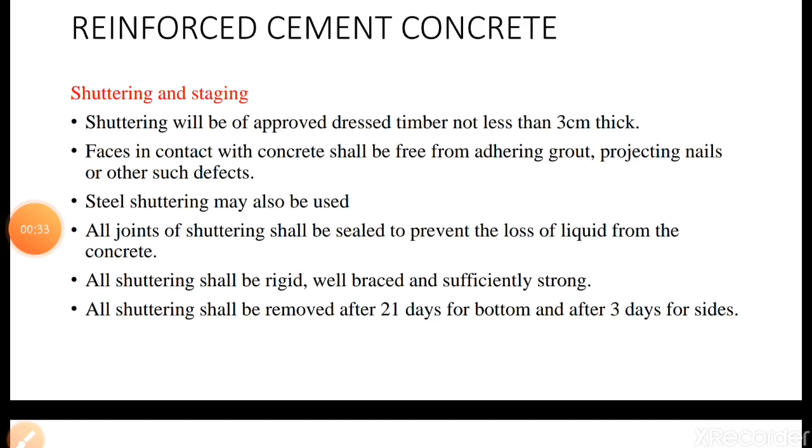Coming to reinforced cement concrete. When we talk about reinforced cement concrete, the specifications written for cement concrete bed will be used, because reinforced cement concrete is nothing but a mixture of cement, coarse aggregates, fine aggregates and water, and additionally we are adding reinforcement. So whatever specifications are required for reinforcement, that has to be added.

Along with that, we require centering and shuttering, because reinforced cement concrete may be used for columns, beams, or slabs. In such cases we need to provide shuttering and centering, which will be wooden or steel. Initially we write the specifications for centering and shuttering, then for the materials - cement, coarse aggregates, fine aggregates, steel and water - then how to mix the materials, laying, protecting and curing. These items follow one by one.

In case of centering and shuttering, shuttering will be of approved dressed timber not less than 3 cm thick. Centering can be done using timber. Earlier only timber centering was available, but nowadays it is replaced by steel. So either steel centering or timber centering can be used.

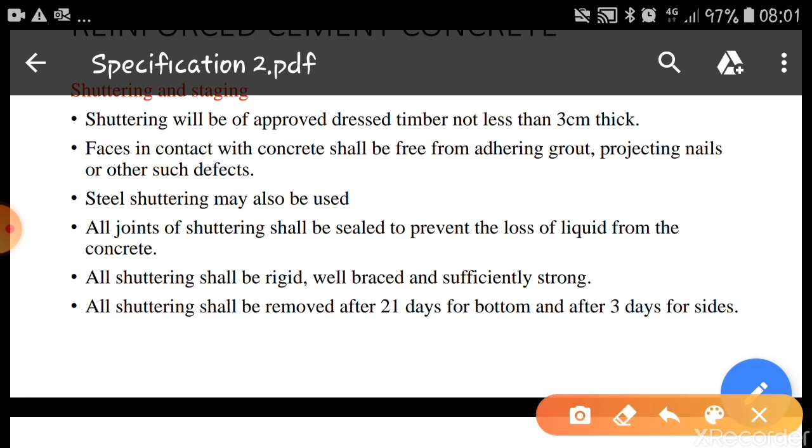Faces in contact with concrete shall be free from adhering grout, projecting nails and other such defects. Whenever we provide concrete above centering, the top surface should be free from adhering grouts, nails or any other defects. It should be smooth so that the concrete will not stick or give a bad impression on the surface. Steel shuttering may also be used for centering.

All joints of shuttering shall be sealed to prevent the loss of liquid from the concrete. Since we provide shuttering using timber or steel sheets, there will be joints between two sheets or between two planks in case of timber, and we have to seal these joints - either by providing steel tape or by providing tapes, so that the liquid from the concrete will not escape from these joints.

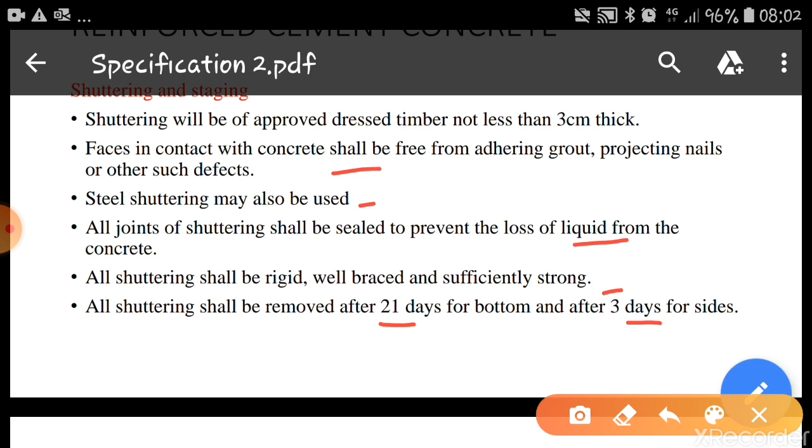All shuttering shall be rigid, well braced and sufficiently strong. All shuttering shall be removed after 21 days for the bottom of slab and beam, and after 3 days for the sides - nothing but sides of the beams or sides of the column.

Coming to the reinforcement, the steel bars shall conform to IS specifications, free from rust, paint, grease, oil, etc. When we talk about steel reinforcement, it is from IS specifications - Indian standard specifications are there which has to be satisfied, maybe the diameter, maybe the length, maybe the strength, all these factors it should satisfy.

All reinforcement bars shall be accurately placed with necessary hooks, bends, etc. Whenever we are going to place the reinforcement, we should see that the steel bars are straight. Wherever hooks are required, these hooks have to be provided, and wherever bends are required, these bends have to be provided clearly.

The cover for concrete to reinforcement shall be as specified. We have to keep covers for the reinforcement so that the steel bars will not be exposed after laying the concrete. According to IS code books, we keep a covering of 20 mm for slabs, 25 mm for beams and 40 mm for columns. These concrete blocks can be of concrete or hard stone as specified by the engineers.

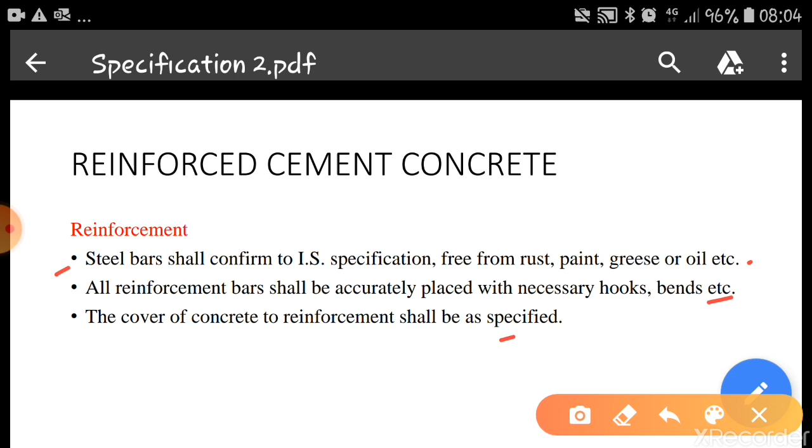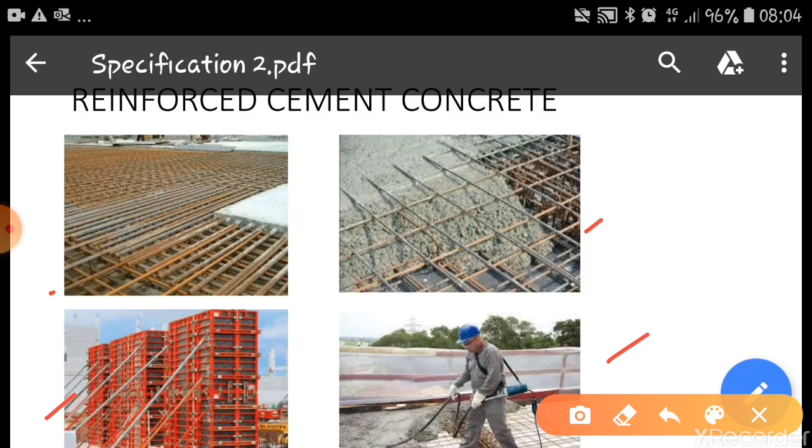As I've told you, proportioning and mixing specifications are the same as that of cement concrete foundation bed. Proportioning of concrete - cement, sand and coarse aggregates - will be 1:2:4 or 1:3:6 as specified. Normally they will specify in terms of M20 or M15 mix. M15 means it is 1:2:4, and M20 means it is 1:1.5:3. These proportions have to be considered.

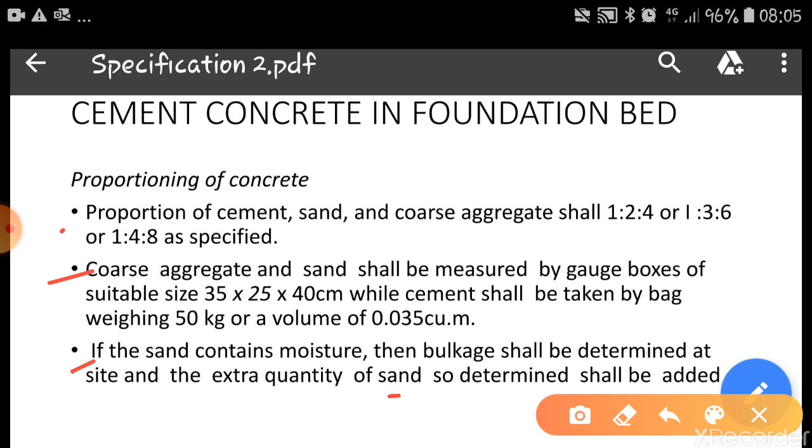Coarse aggregates and sand shall be measured by gauge boxes of suitable size. The volume of gauge boxes should be 0.035 meter cube, or equal to the volume of cement, so that we can perfectly do the volume batching. If the sand contains moisture, then bulkage shall be determined at the site and extra quantity of sand shall be added. As far as possible the sand should be dry, but if the sand contains any moisture, then proper amount of bulkage has to be considered.

Mixing can be done either by hand mixing or machine mixing. If you are using hand mixing with a 1:2:4 or 1:1.5:3 proportion, we have to spread all the coarse aggregates first on a dry platform. Then over that we apply a dry mixture of cement and sand, making sure this dry mixture spreads entirely over the aggregate, and then we apply water and mix it thoroughly. This is called hand mixing.

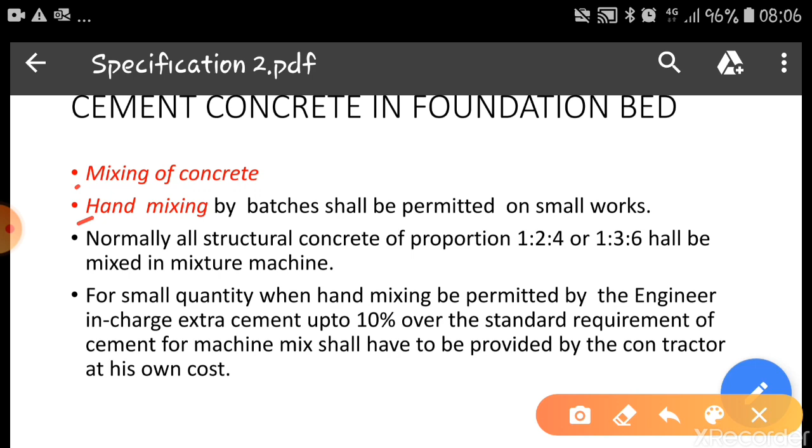But normally for reinforced concrete, we are not going for hand mixing unless the quantity is very small. Sometimes for columns, because the quantity will be small, we go by hand mixing. But as far as possible, mixing should be done using concrete mixers.

In machine mixing, the coarse aggregates shall be placed first, followed by sand, cement, and then water. This is the procedure for putting things in the mixing machine. Water is then added gradually to the required quantity to achieve the desired water cement ratio. Mixing shall continue until there is uniform distribution of material and the concrete is uniform in color and consistency, but in no case shall mixing be done for less than 2 minutes after all materials, including water, are in the drum. So a minimum period of 2 minutes we have to keep the materials inside the drum, then remove it and lay it on the surface.

The mixed concrete shall be unloaded on a watertight masonry platform or on a steel plate. Only the quantity required for immediate use should be mixed at one time, and the entire quantity shall be removed and placed in position before the initial setting time of the cement. Normally the initial setting time of cement is 30 minutes, and within that time we have to complete all the processes of mixing, laying, compaction, and vibration.

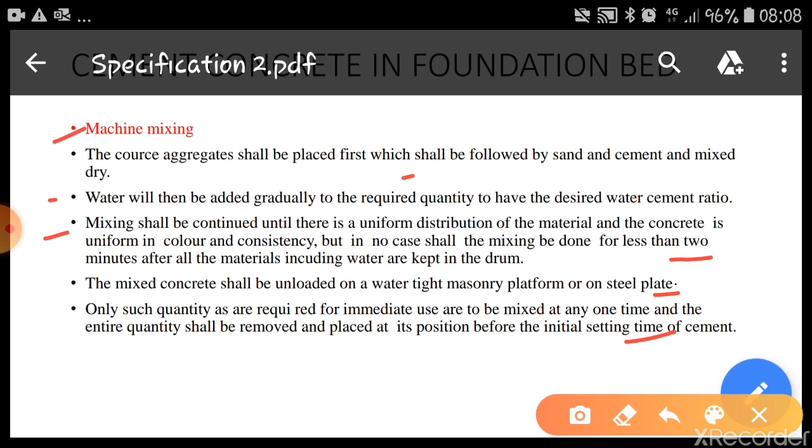Workability of concrete shall be checked at frequent intervals. The slump test, or where facilities exist, the compaction factor test, shall be adopted for this purpose.

Before proceeding to place the concrete, the masonry platform or centering should be wetted so that any dust particles are removed from the surface. Concrete shall be dropped from a height of not more than 1 meter. Each layer of concrete placed will be consolidated by mechanical vibrator. All surfaces after consolidation shall be free from air holes, honeycombing, and other blemishes. Any water accumulation on the surface of newly placed concrete shall be removed by approved means.

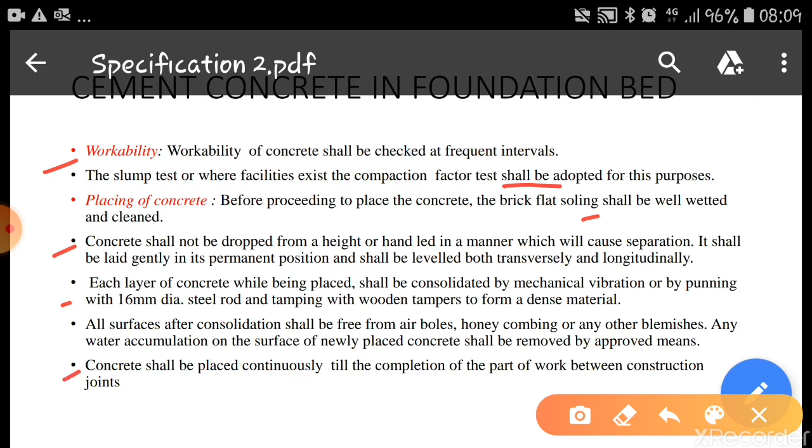Concrete shall be placed continuously till the completion of the part of work between construction joints.

Regarding protection and curing: all fresh concrete shall be protected for 1 to 2 hours after laying from too rapid drying due to sunshine, and also from running surface water and shocks. That's why you have to see that if it's too dry, you have to sprinkle water on the surface of the concrete after 3 or 4 hours. Otherwise the concrete will dry too quickly and form shrinkage cracks on the top layer.

After 24 hours of laying the concrete, the surface shall be cured by flooding with water of minimum 25 mm depth or by covering with wet absorbent materials. Normally the method adopted is flooding. For slabs we do it by flooding, and for columns we cover them with gunny bags and keep watering the surface. The curing period shall be continued for 10 days, not 28 days. For beds, 10 days is sufficient, but for RCC works, 28 days of curing is required.

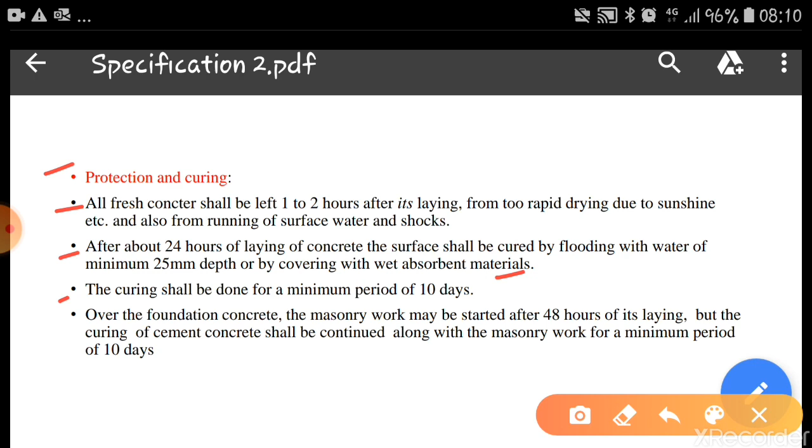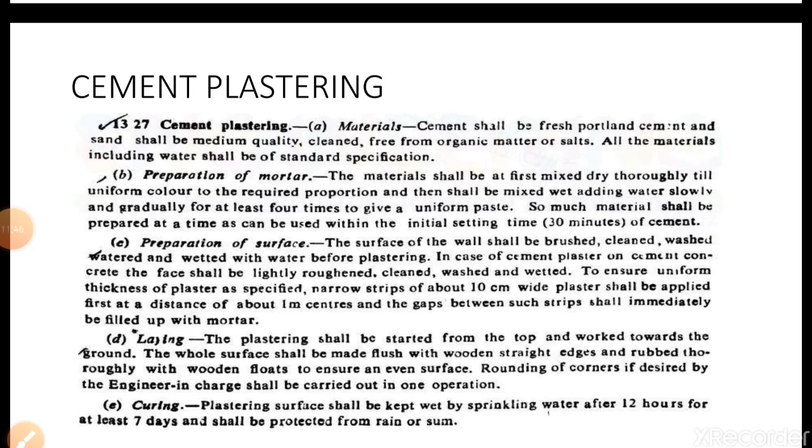So the next item we are going to discuss is the specifications for cement plastering. Cement plastering is a finishing item done once the concrete or masonry work is completed. Plastering can be done on masonry surfaces or on concrete surfaces.

When we do plastering, the surface must be clean and should not contain any dust or loose particles. We have to remove all loose particles on the surface of the masonry. If it is a concrete surface, the surface should be rough; otherwise we have to do hacking so that the plaster adheres properly to the concrete surface.

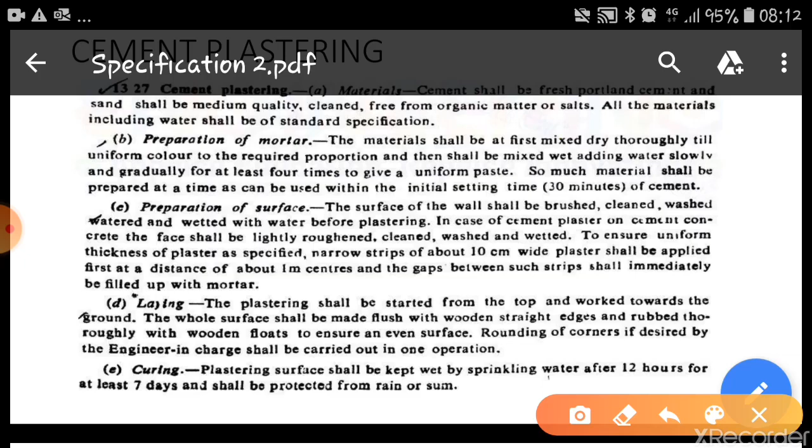As usual, before writing the specifications, first we have to write about the materials, then about the preparation of cement mortar, and then the preparation of surface, laying, and curing. These steps should be involved in the methods.

As the first step, cement materials: normally for cement plastering we require cement, sand and water, in the proportion as mentioned by the engineer. The material is nothing but cement, which shall be fresh Portland cement conforming to standard specifications. Again, we are not going to specify the brand name here, only that it should be as per standard specifications.

Sand should be medium quality, clean, free from organic matters and salts. Normally for plastering we use medium or fine quality sand, and it should be free from salts. Otherwise later the salt portions will appear and it will destroy the surface.

All the materials including water shall be of standard specifications. Water which is fit for drinking can be used. So these are the specifications which are required for materials.

Coming to the preparation of mortar. The material should be first mixed dry thoroughly till uniform color to the required proportion, and then shall be mixed wet, adding water slowly and gradually for at least 4 times to give a uniform paste. This is the procedure of mixing the materials.

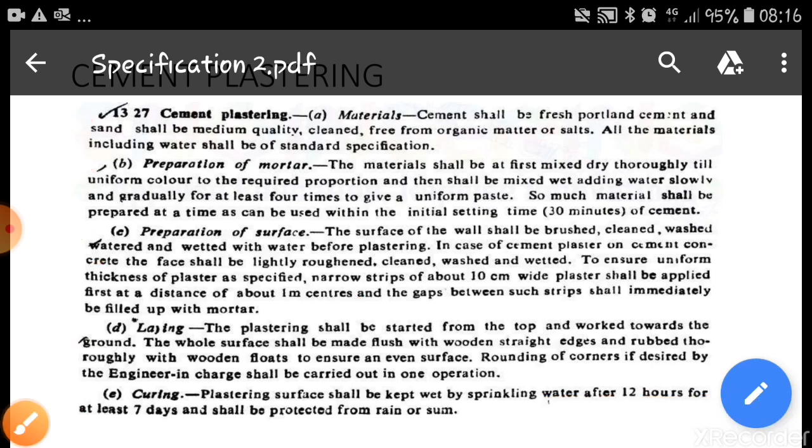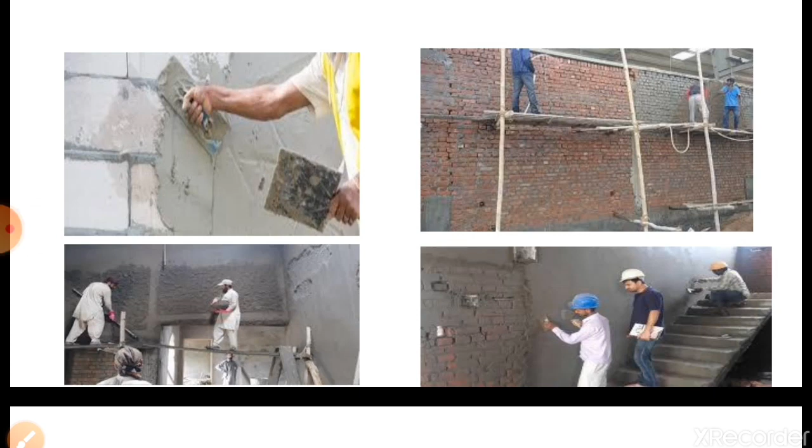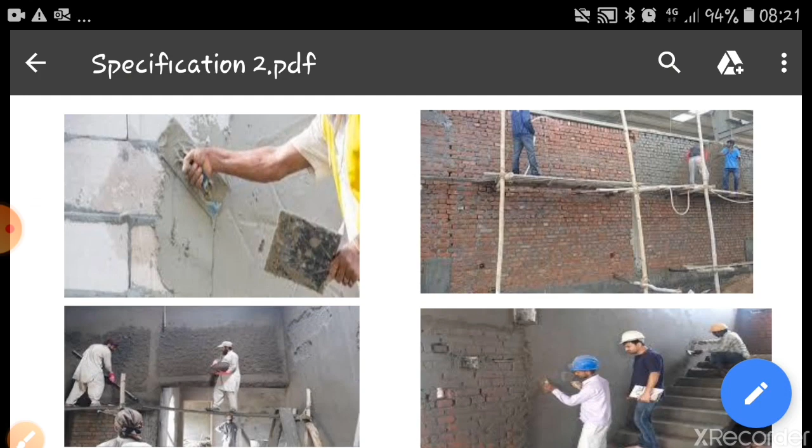This figure shows how the plastering work will be done. In the first figure, it shows how the wooden float is used for plastering. Second, the scaffolding is provided and the plastering will be done for the brick masonry work. Similarly, the other two figures also show the methods of plastering work.

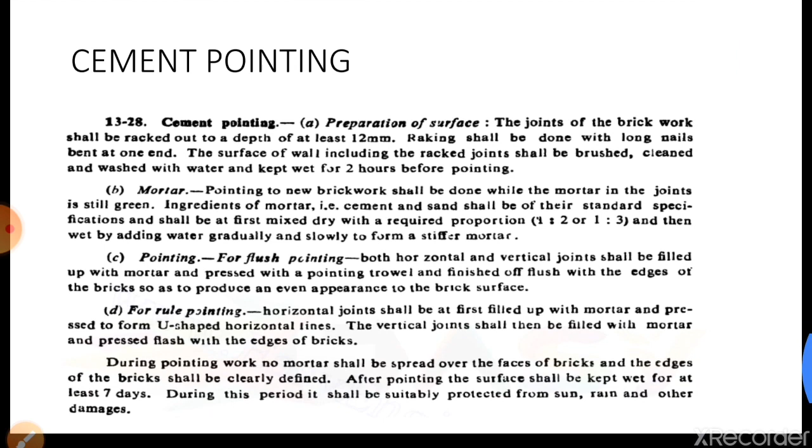Next item we are going to discuss is cement pointing. Sometimes for brickworks we are not going to plaster the entire surface, whereas we'll do the pointing only for the joints so that the bricks look natural, and that is called pointing. Various different types of pointings are available: flush pointing, rule pointing, etc.

So here also, while writing the specifications for cement pointing, first you have to write about the materials, then the preparation of surface, mortar, and then different types of pointings and protection. These items we have to include. So specifications will remain almost similar to those we have written for cement plastering, because we have to prepare the mortar, and to prepare the mortar the materials required are cement, sand and water. That's why we can write the same specifications what we have written for cement plastering.

So I'll directly start with the preparation of surface here. Preparation of surface: the joints of the brickwork shall be raked. This is important now. Raked to a depth of at least 12 mm.

Whatever joints already prepared while laying the masonry, those should be raked so that all the loose contents of mortar shall be removed. Raking shall be done with long nails bent at one end so that it goes easily inside the joints and can remove all the loose mortar particles from the joints.

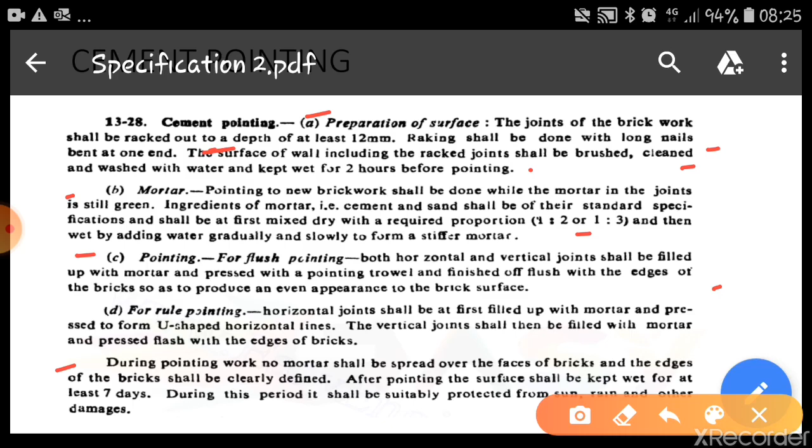All pointing work shall be kept wet for at least 7 days, and during this period it should be protected from sun, rain, and other damages. The figure indicates how the pointing will be done on the brick masonry wall.

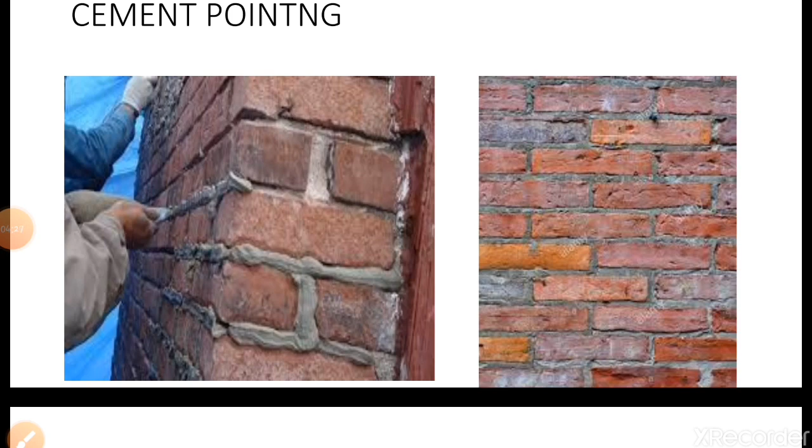So the next item is, once the plastering is done, then it has to be painted. We have various qualities of painting, that may be whitewashing, distempering, or color washing. A variety of paints are available nowadays, and we can do the painting as specified by the engineer.

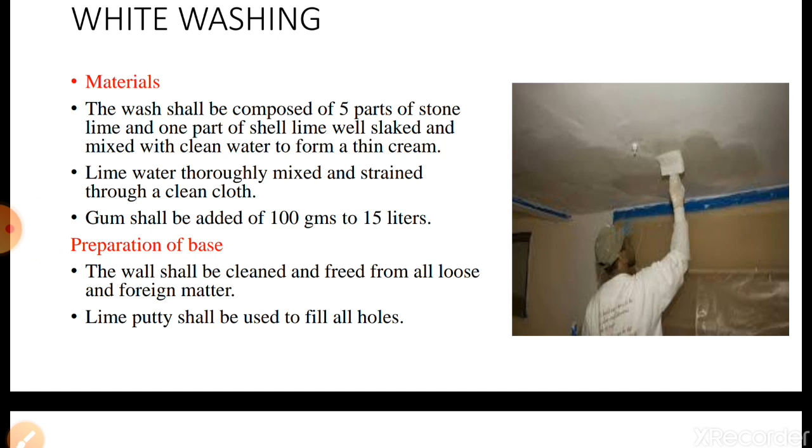Whitewashing is nothing but, in earlier days it was done using lime, but nowadays white paints are directly available and that also can be applied. Now for this whitewashing, we will use lime and do the whitewashing.

So the material, as I've told you, is lime. The wash shall be composed of 5 parts of stone lime and 1 part of shell lime, well slaked and mixed with clean water to form a thin cream. We have to take 5 parts of stone lime and 1 part of shell lime, mix thoroughly and slake so that it becomes a thin cream.

The lime water shall be thoroughly mixed and strained through a clean cloth. Once we get the cream, it should be thoroughly strained with a clean cloth so that we get milky water, which can be applied on the surfaces.

Gum shall be added, 100 grams to 15 liters of the paste. This gum is required so that the lime water will stick on the surface of the masonry.

Preparation of the base: the wall should be cleaned and free from all loose and foreign matter. Then lime putty shall be used to fill the holes. If there are any holes in the stones, those holes should be filled first. The mortar holes should be filled first using lime putty, and then only the whitewashing should be done.

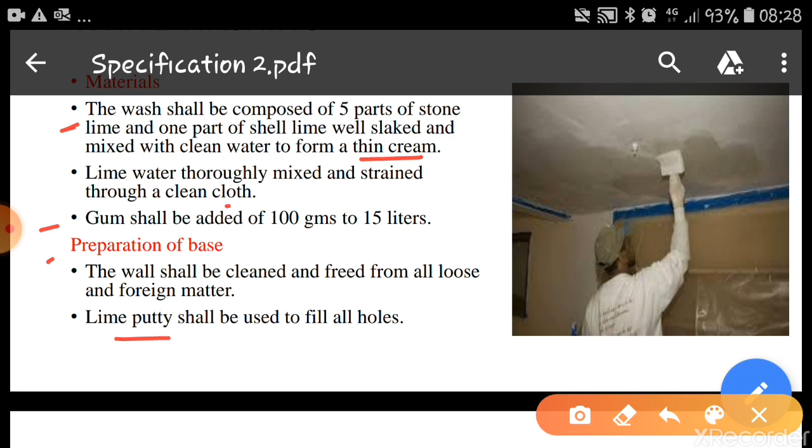The method of application: whitewash should be applied with hair brushes, vertically and horizontally alternately. If the first coat is done vertically, then the second coat should be done horizontally. Each coat should be perfectly dry before the succeeding coat is applied. Once the first coat is laid, we should see that it is perfectly dry before applying the second coat, otherwise the effect will not appear on the wall.

Whitewash shall be kept stirred. Since it is a mixture of lime and water, you have to continuously keep stirring it, otherwise the lime particles will settle down and the water will come on top. Whitewash shall not be splashed on the floor or other surfaces. 2 or 3 coats shall be applied as specified by the engineer. So these are the specifications required for whitewash.

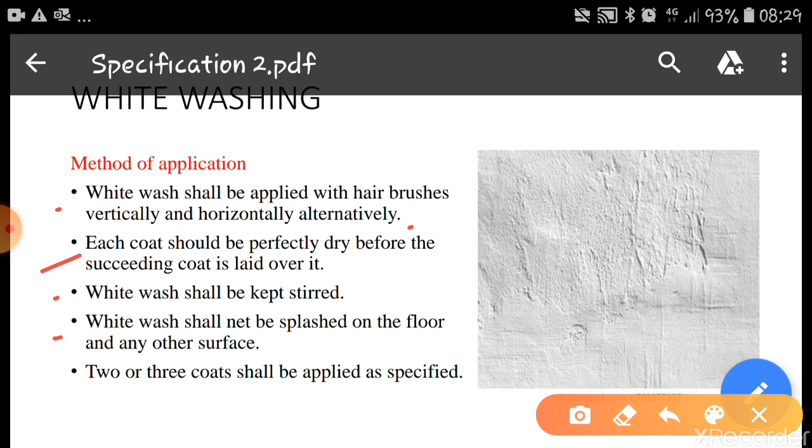Similarly, we can write the specifications for color washing also. It is the same, only the difference is we can add the required coloring pigment to the whitewash, and it becomes color washing. So these are the specifications required for painting works.